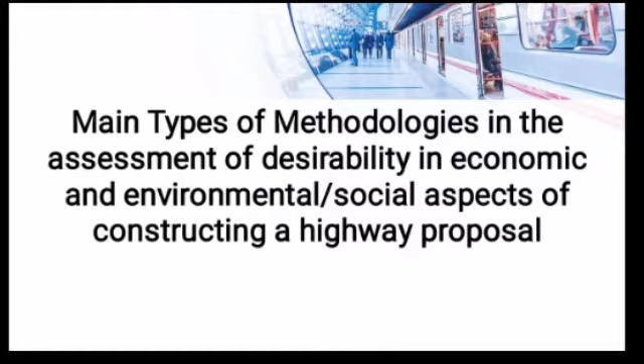Hello po, welcome po sa chapter ng Scheme Appraisal for Highway Projects. Today we're going to talk about the main types of methodologies in the assessment of desirability in economic and environmental or social aspects of constructing a highway proposal.

So, economic appraisal of highway schemes, highway economic analysis, also known as project appraisal, involves quantification of the costs and benefits from a scheme over a selected time horizon and evaluation by a common yardstick. The technique is also known as benefit cost analysis.

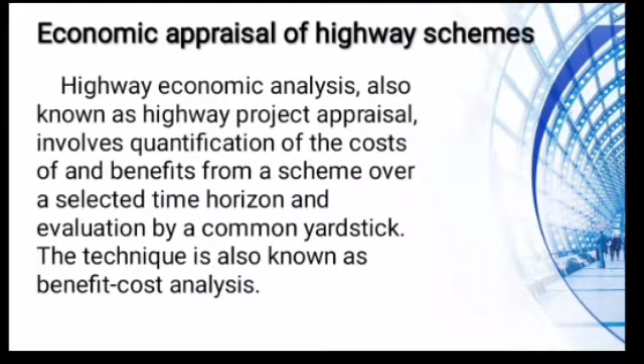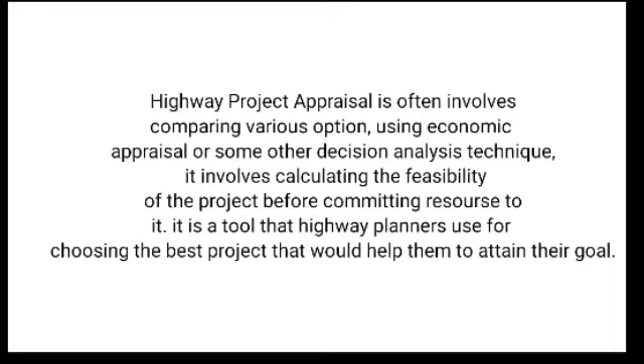So, highway project appraisal often involves comparing various options using economic appraisal or some other decision analysis technique. It involves calculating the feasibility of the project before committing resources to it. It is what highway planners use for choosing the best project that would help them attain their goal. So, sa next slide tayo.

Economic appraisal of highway schemes. The aim of the highway appraisal process is therefore to determine the economic, societal, and environmental feasibility of the project or group of projects under examination. The process enables highway planners to decide whether a project is desirable in absolute terms and also provides a means of choosing between different competing project options, all of which have the ability to meet the stated goals and objectives of the project sponsor. So, why is it important to know the feasibility of the project?

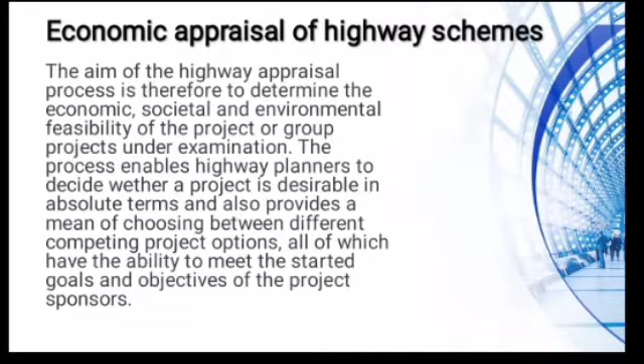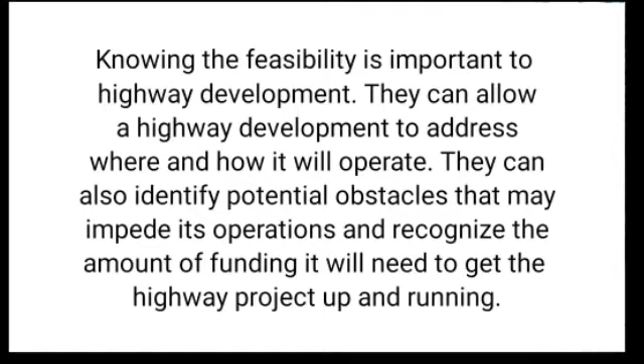It is necessary to determine the economic, societal, and environmental feasibility of the project because knowing the economic feasibility is important to highway development. It can allow a highway development to address where and how it will operate. It can also identify potential obstacles that may impede its operation and recognize the amount of funding it will need to get the highway project up and running.

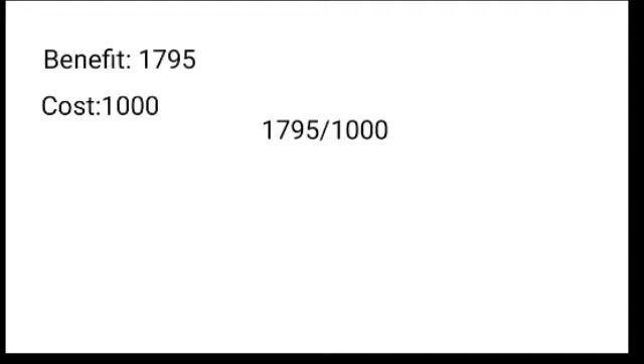Cost-benefit analysis or CBA. A cost-benefit analysis is the process used to measure the benefits of a decision or taking action minus the costs associated with taking that action. A CBA involves measurable financial metrics such as revenue earned or cost saved as a result of the decision to pursue a project. So, cost-benefit is as simple as dividing the benefit by the cost to calculate the benefit to cost ratio. Sample natin ay mayroong kitang 1,795 over 1,000. So, ang equals nun is 1.795.

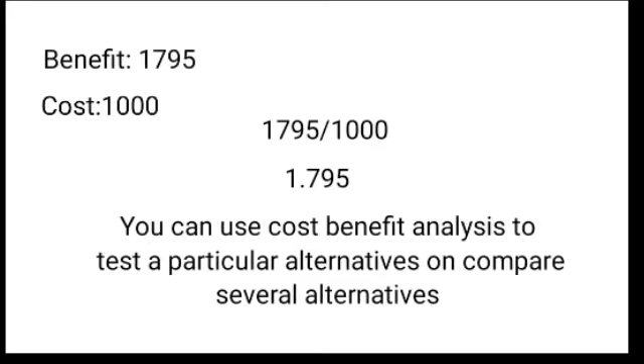You can use the cost-benefit analysis to test particular alternatives or compare several alternatives. Kung ano yung pinakamataas na benefit cost ratio, siya yung pinaka choose natin.

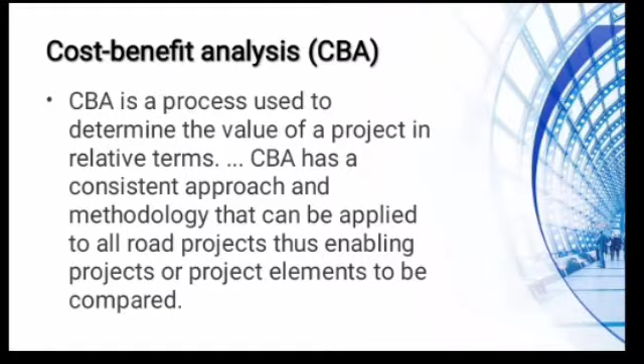Again, cost-benefit analysis or CBA. CBA is a process used to determine the value of a project in relative terms. CBA is a consistent approach and methodology that can be applied to all road projects, thus enabling projects or project elements to be compared. Nag-conduct tayo ng CBA or cost-benefit analysis if mag-pursue tayo ng project or mag-assess tayo ng value ng project. Pwede din namang i-compare natin yung mga option na available.

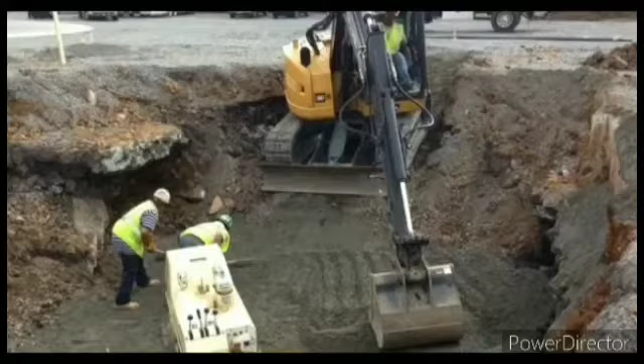So we all know that in every engineering project, there is always impact on the environment: the excavation, the cutting of trees, increased noise, air pollution, reducing habitat for animals, and many more. So in order to lessen the impact of the construction process, assessment should be done. This kind of assessment began in the United States in 1969 when environmental issues gained in importance. The structure developed within the last 30 years and it is called Environmental Impact Assessment or EIA.

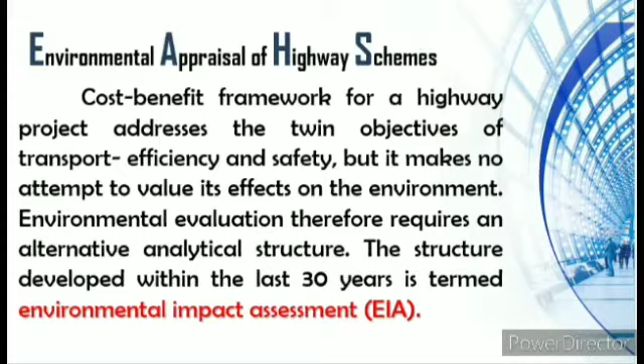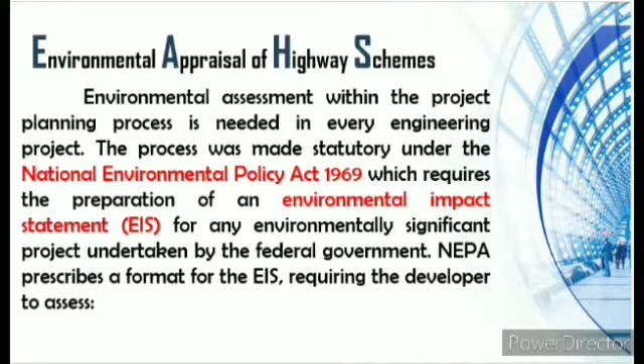Environmental assessment within the project planning process is needed in every engineering project. The process was made statutory under the National Environmental Policy Act of 1969, which requires the preparation of an environmental impact statement for any environmentally significant project undertaken by the federal government. So in every engineering project, kailangan natin ng environmental assessment before ma-approve ang iyong project. So NEPA prescribes a format for the EIS requiring the developer to assess the following.

1. The probable environmental impact of the proposal. 2. Any unavoidable environmental impacts. 3. Alternative options to the proposal. 4. Short-run and long-run effects of the proposal and any relationship between the two. And the last, any irreversible commitment of resources necessitated by the proposal. This list aids the identification and evaluation of all impacts relevant to the evaluation of the project concerned.

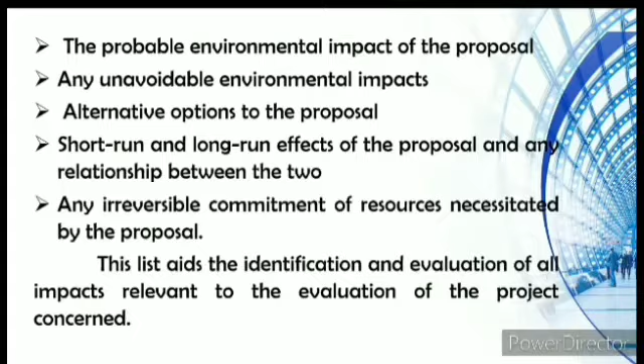But why is there a need for an environmental assessment? So here is the objective. A central objective of this program was to put in place a mechanism for ensuring that the effects on the environment of development projects such as major highway schemes would be taken into account at the earliest possible stages within their planning process.

Minimum information that must be contained within the EIS are: 1. A physical description of the project. 2. A description of measures envisaged to reduce or remedy the significant adverse environmental effects of the project. 3. The data required to identify and assess the main effects on the environment of the project in question.

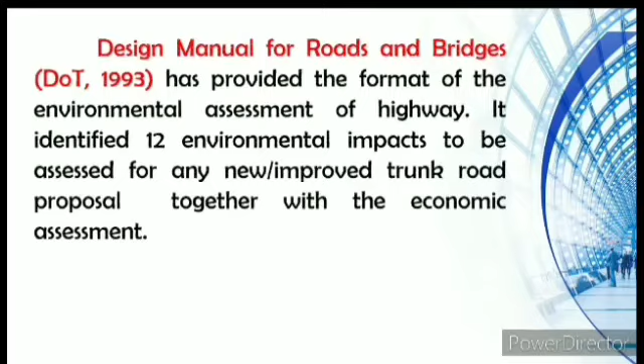The Design Manual for Roads and Bridges has provided the format of the environmental assessment of highways. It identified 12 environmental impacts to be assessed for any new or improved trunk road proposal together with the economic assessment. So what are these 12 environmental impacts?

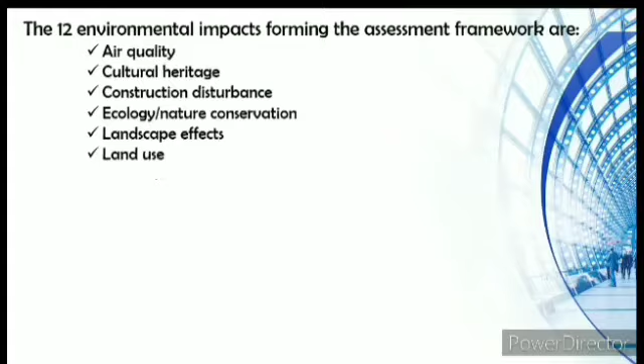So the 12 environmental impacts forming the assessment framework are: Number 1, air quality. Vehicle pollutants such as carbon monoxide, oxides of nitrogen, hydrocarbons, lead, carbon dioxide, and particulates are assessed. Established models are used to predict future levels of these pollutants, and the values obtained are compared with current air quality levels. In this way, we can assess the impact of the project on air quality in the place.

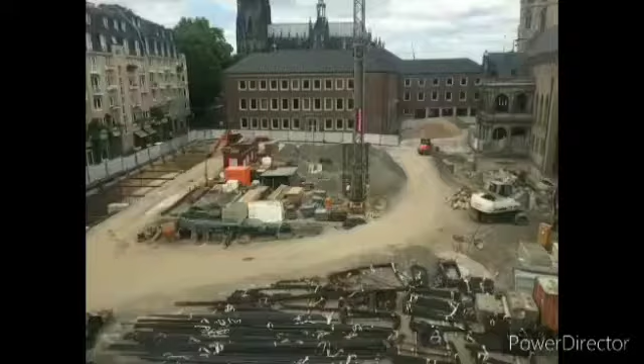2. Cultural heritage. Under this, it is assessed if the project will disrupt or affect any cultural heritage site. 3. Construction disturbance. Under this, nuisances such as dirt, dust, and increased levels of noise and vibration created by the process of construction are assessed to see if they affect the viability of the project.

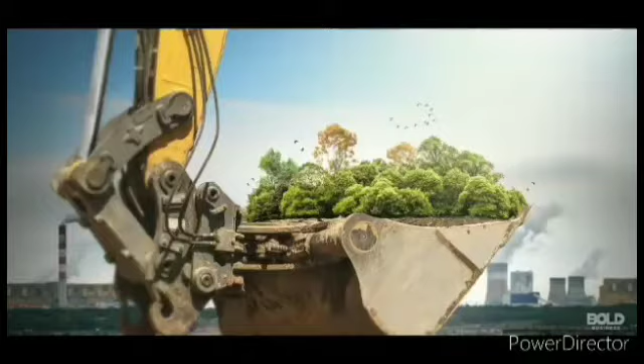4. Ecology or nature conservation. The highway being proposed may negatively affect certain wildlife species and their environment or habitats along the road corridor in question. Habitats may be lost, animals killed, and flora or fauna may be adversely affected by vehicle emissions.

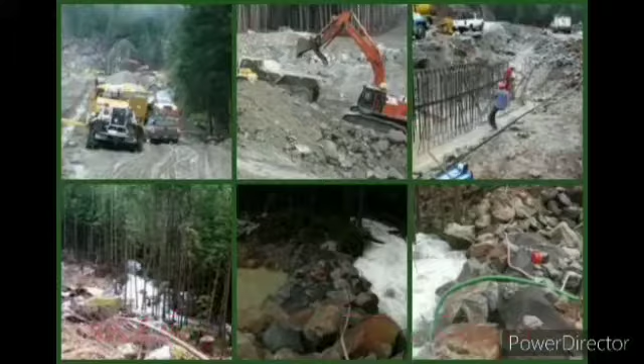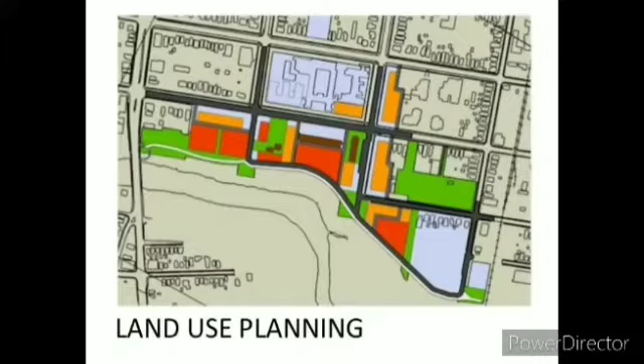Number 5. Landscape effects. The local landscape may be fundamentally altered by the construction of the proposed highway if the alignment is not sufficiently integrated with the character of the local terrain. Other environmental impacts are land use, traffic noise and vibration, pedestrian, cyclist, and community effects, vehicle travelers, water quality and drainage, geology and soils, and policies and plans.

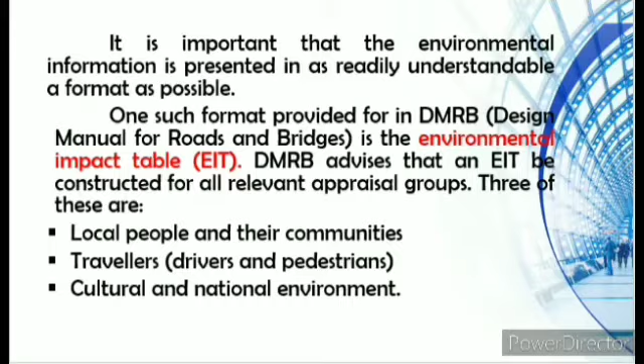It is important that environmental information is presented in as readily understandable a format as possible. One such format provided for in DMRB is the Environmental Impact Table, or EIT. DMRB advises that an EIT be constructed for all relevant appraisal groups such as local people and their communities, travelers, and the cultural and natural environment. Here is an example of an environmental impact table.

As a summary, an environmental assessment is very crucial in every construction project in order to assess its impacts on the environment. We can assess it by using the assessment framework through the 12 environmental impacts. And an environmental impact table (EIT) is a good way to show the impacts relevant to each of these appraisal groups. The basic elements of traffic analysis.

We all know that the functionality or the effectiveness of a highway is measured in terms of its ability to assist and accommodate the flow of vehicles with both safety and efficiency. But in order to do that, in order to measure its level of effectiveness, certain parameters associated with the highway must be measured and analyzed.

So here are the following parameters: the quantity of traffic, the type of vehicles within the traffic stream, the distribution of flow over a period of time, usually 24 hours, the average speed of the traffic stream, and the density of the traffic flow.

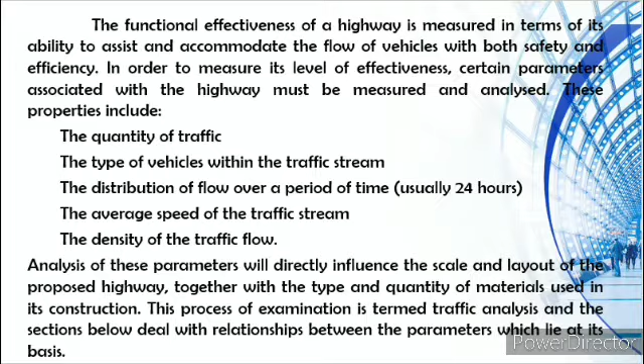Analysis of these parameters will directly influence the scale and layout of the proposed highway, together with the type and quantity of materials used in its construction. This process of examination is termed traffic analysis, and the sections below deal with the relationship between the parameters which lie at its basis: the speed, flow, and density of a traffic stream.

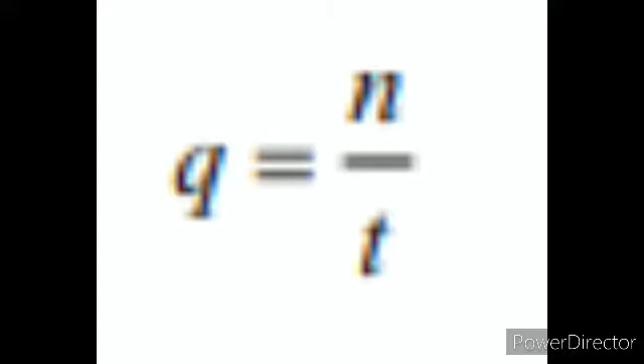The traffic flow, represented by Q, a measure of the volume of traffic on a highway, is defined as the number of vehicles N passing some given point on the highway in a given time interval T. In equational form, Q equals N over T, or the traffic flow equals the number of vehicles over the time interval. In general terms, Q is expressed in vehicles per unit time.

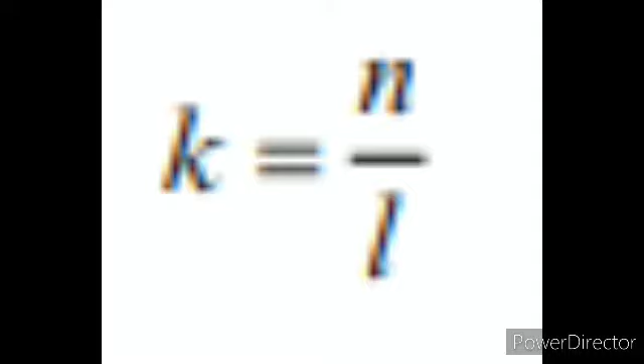At other times, the number of vehicles in a given section of highway can also be computed in terms of the density or concentration of the traffic as follows. The equation is K equals N over L, where the traffic density K is a measure of the number of vehicles N occupying a length of roadway L.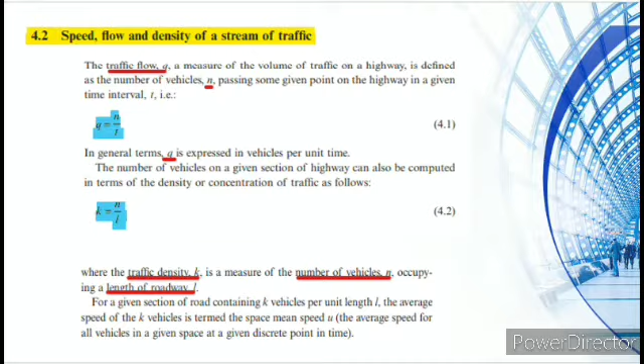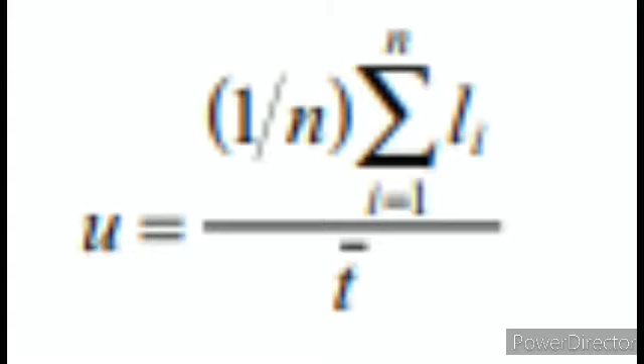For a given section of road containing vehicles per unit length, the average speed of the vehicles is termed the space mean speed U, or the average speed for all vehicles in a given space at a given discrete point in time. So if you want to know the average speed for all vehicles in a given space at a given discrete point in time, this is the expression, where L is the length of the road used for measuring the speed of the vehicle.

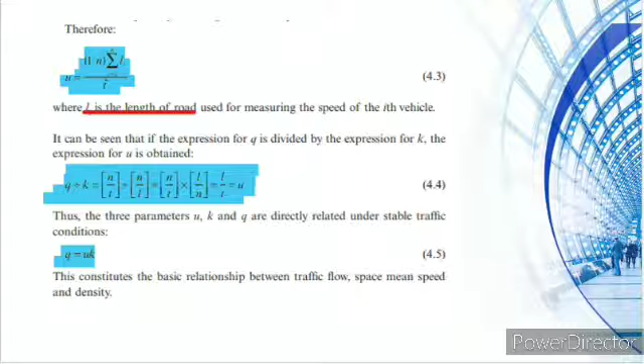It can be seen that if the expression for Q is divided by the expression for K, the expression for U is obtained. Thus, the three parameters U, K, and Q are directly related under stable traffic conditions. So Q equals UK. This constitutes the basic relationship between traffic flow, space mean speed, and density.

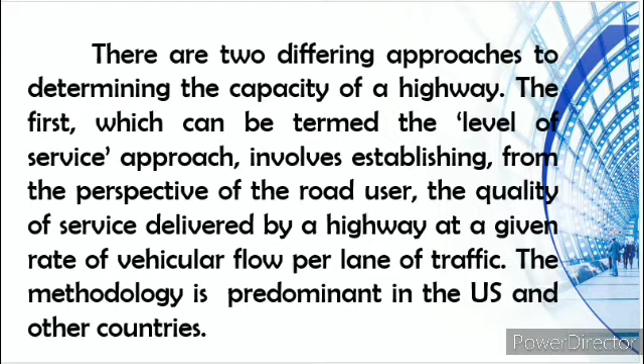Determining the capacity of a highway. There are two differing approaches to determining the capacity of a highway. The first, which is predominant in the US and other countries, is called the level of service approach, and it involves establishing from the perspective of the road user the quality of service delivered by a highway at a given rate of vehicular flow per lane of traffic.

The second approach, which is used in Britain, puts forward practical capacities for roads of various sizes and carrying different types of traffic. Within this method, economic assessments are used to indicate the lower border of a flow range, the level at which a given road width is likely to be preferable to a narrower one.

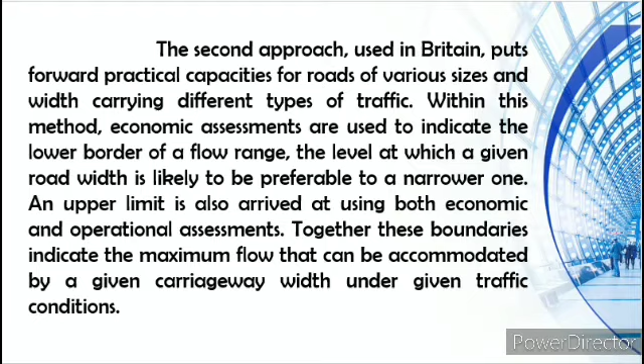An upper limit is also arrived at using both economic and operational assessments. Together, these boundaries indicate the maximum flow that can be accommodated by a given carriageway under given traffic conditions.